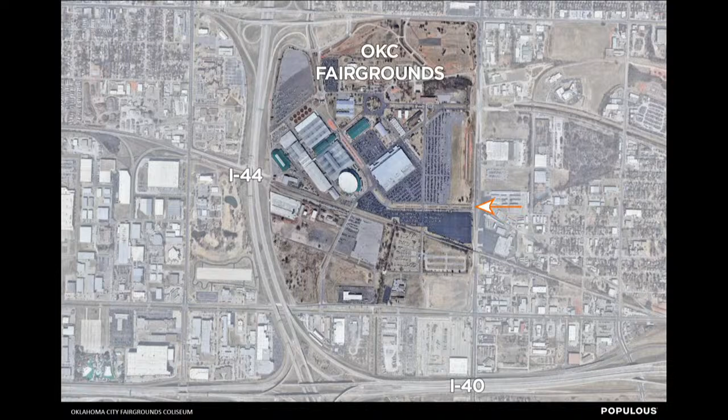So just giving us a frame of reference, once again, we're right here at the fairgrounds along I-40 and I-44, main entry off of May Avenue there on Gordon Cooper Boulevard. Replacing the existing Norick Arena, built in 1965, full all year long with over 250 event days a year, and we're going right up there next to it.

As I pointed out last time, we're actually overlapping just slightly a little bit of the front entry of the Norick Arena due to a couple factors.

Those utility restrictions prevent how far away we can get, and we want the Norick Arena to remain operational throughout construction of this new Coliseum, so we can't go right on top of it. This will be done in phases, which I'll walk through in the next few slides.

One item to point out that wasn't on the previous presentation is the expanded parking shown south of the railroad tracks. That's a separate project from ours—they're starting that now, and it will replace the parking our Coliseum is going to overtake with the new building.

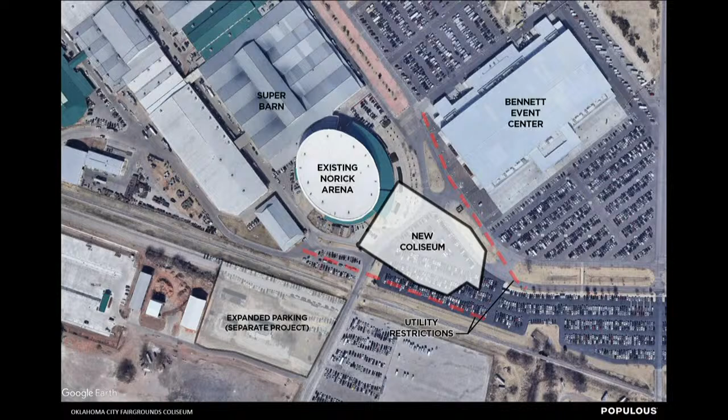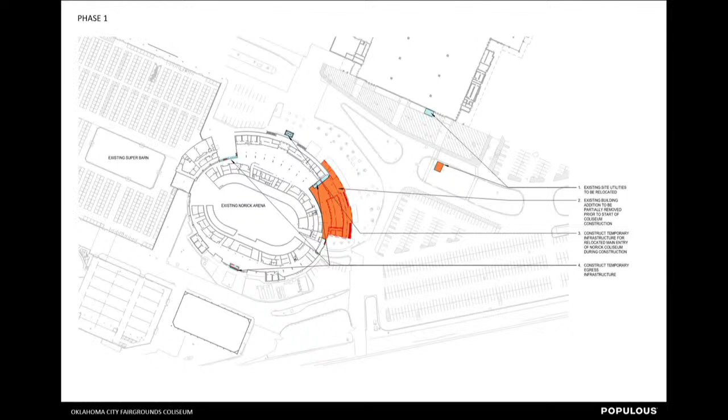Phase one of the project is the removal of the part that overlaps the existing Norick Coliseum. This shows the demolition portion in orange and the new construction portion in blue, which I'll zoom in on in the next few slides.

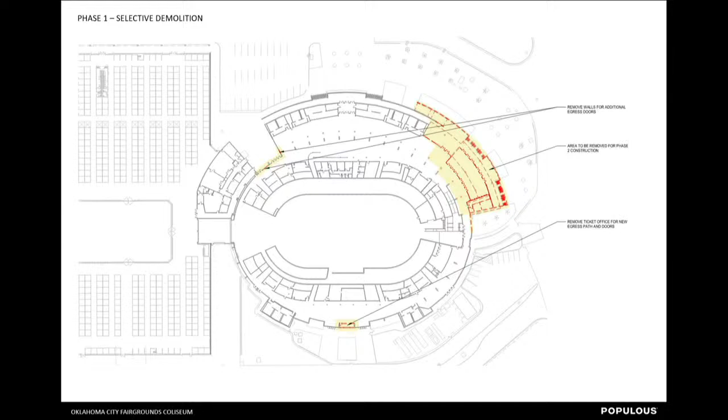The portion highlighted in yellow on your right is what we'll be taking off to make room for the new construction. That's currently the main entry to the Norick Arena, so we'll need to reroute entry and provide new exit doors when that's taken off. The other two smaller highlighted areas are demolition to make room for those new exit doors. So when that's done, this is what the Norick will look like during construction of the new Coliseum.

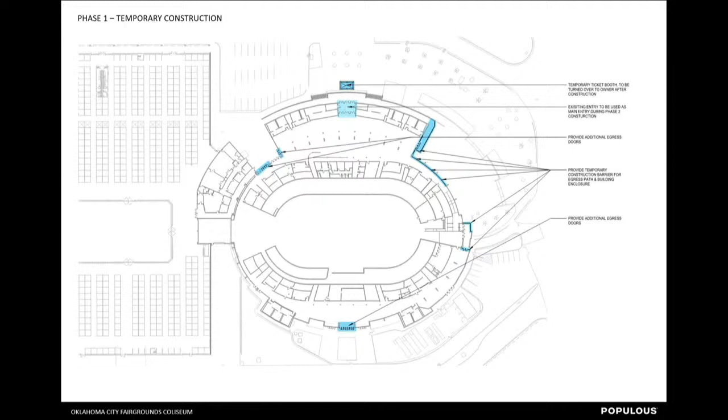The main entry will become the one on the north side of the building, which should work well since it's already one of the main entry points. We'll locate a temporary ticket office right outside, in front of the stairs, for them to use. The other areas shown are where we're relocating those egress elements—the exit doors—to make up for the doors being removed in the demolished area.

Phase two will be the construction of the new Coliseum, and phase three will be the demolition of the existing Norick Arena. We'll zoom in on that a little bit.

One thing different from the last time I showed this is that after talking with engineering teams, demolition contractors, and other groups, we think we'll be able to save that show office shown in blue. It's a unique structure—the last thing added to the Norick—and it straddles between the super barn on your left and the Norick Arena, facilitating both sides.

It's literally nested inside the super barn, so demolition of that was going to be really complex. We started studying whether we could keep it, because it's critical to fairgrounds operations, and demolishing it and having to build a brand new one would be a lot of trouble for them. If we can keep it, it will save us quite a bit of money on the project.

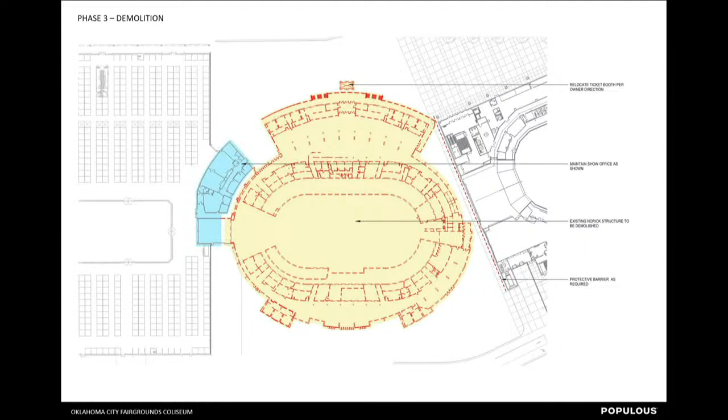After consulting with several firms, we determined that with some selective and careful demolition work, we think we can keep it. A portion will be removed where it utilizes the Norick ring wall, so we'll build back a new portion on the east side of that.

That's what you see here in phase four. Thinking about that, we thought it made sense to square that off so it's ready for the connector when it comes on board, and we can put that right up against there. That'll need to be a firewall, so a nice clean straight wall allows us to build that firewall and connect the connector right up against it.

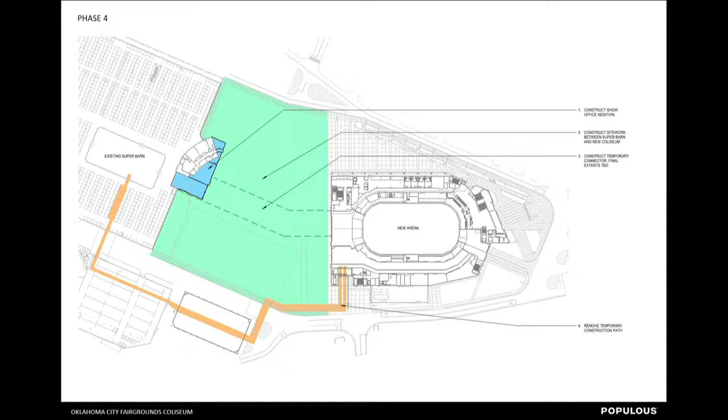From the exterior, you'll never notice that odd geometry in the middle. You can see with the dashed lines where the connector would abut the show office, then come across on the other side and connect to the new Coliseum. So this is our current site plan.

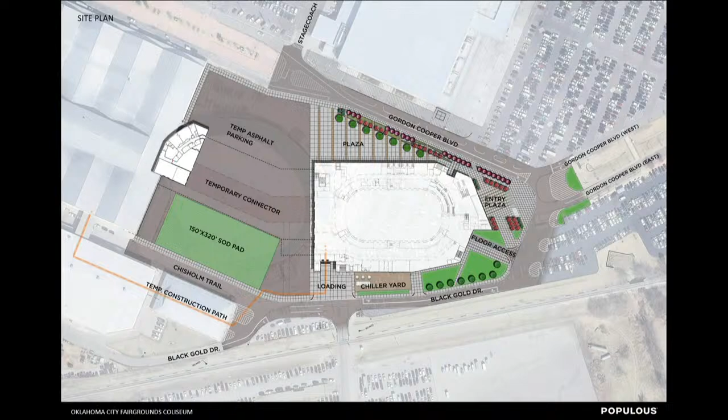You can see the nice plaza space there on the north side that will eventually extend all the way across to the super barn when the connector's done. The entry plaza there off of Gordon Cooper Boulevard at our main entry, and then coming around the south side, we've got some landscaping to shield the chiller yard, and then our Del Mar Gardens entry and loading area there on the south.

Looking at the floor plan, it hadn't changed a lot since the last time you saw it. I'll zoom into each area so we can look at it a little more in depth, starting with quad A in your upper right and then going around in a clockwise direction.

So here in quad A, we've got our lockers up at the top, shown in orange. We've got 6 total lockers, 4 shown here. Those have an operable partition between 2 of them so they can open up into a larger locker room space.

We've got our court storage where the basketball tournaments will store the courts and the goals. Our main restrooms off the main lobby there, shown in navy blue, and then our retail space there in purple.

The multi-function space will be left open so they can program it however needed per event. We've located doors on both the exterior and interior side so they can program that and access control it, so the exterior doors are locked if they have an arena event they only want access to from the arena side, or if they have the fair going on and want to open up the Made in Oklahoma store, but don't have something going on in the arena, they can open up those exterior doors and lock up the interior doors and have that access right there from the exterior.

We've got our ticket office there with a couple of offices in the secured area and a conference room, and 2 additional offices outside of the secured ticket area.

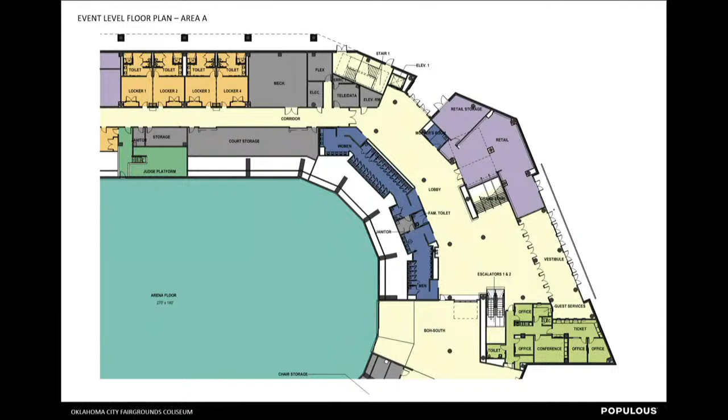As we come on around, we've got our retractable storage and chair storage here for the floor events. Those will come right out those big overhead doors and come through that back of house south area and go right onto the floor for events where we have full seating capacity. Those will be stored right there when they're not in use.

We've got our judges platform shown right there in green, centered on either side. That's right off the arena floor - one of the unique spaces in this arena. It's different than most. You'll be able to access that from the return alley side or the arena floor side, go up into the judges platform, and then come out of there and go onto the arena floor to hand out awards or go back through the back of house space. When that's not in use, we can infill that area for the full bowl to be seated all the way around.

We've got our green room and crew room there in orange, and then our loading dock down on your lower left side. Our large back of house space, where they'll set up all their penning and things like that for equine and livestock events, is there on your left.

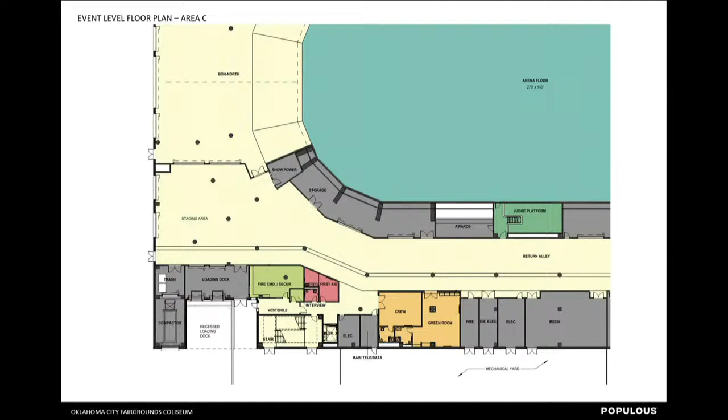And our north lobby there on your upper left - the main lobby for people coming from the barns or the fairgrounds will come into that space, secondary lobby there. And then our main kitchen area just to the right of that in purple.

That kitchen has a dedicated service elevator, number 3, that is accessed from the kitchen and goes up to a back of house area on the 2nd floor, so they've got dedicated service to bring things into the lounge space or concession spaces as needed. And then elevator 4 faces the lobby side and will be the public elevator for that lobby.

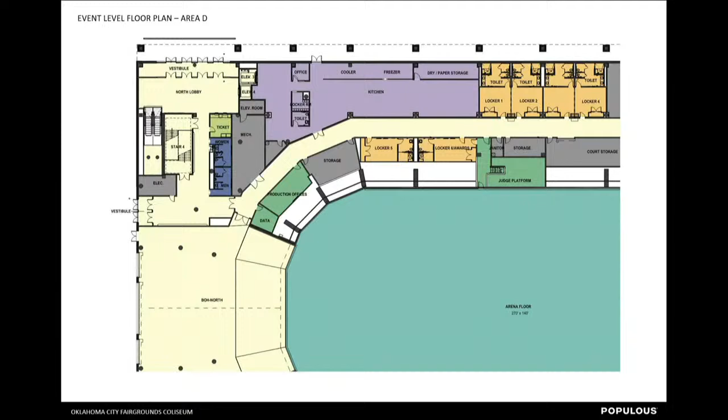As we get up to the 2nd floor, once again pretty similar to the last time you saw it, we've got our concessions in the 4 quadrants, our lounge space on the left, and our main bar on the right. We'll zoom in on around there so you can see it a little closer as well.

Nice big open concourse space as you come up from the main entry, with room for vendors to be located there on your far right side.

That'll be along that east facade that has the windows, so it'll be a really nice big open space with a high ceiling. Our main public bar is there on the bottom portion of the screen, and then our production suite in the green color, really nicely situated up above the seating on the concourse level with a straight shot view right to the stage, whether it's a center stage or an end stage. They'll have a really good view out the windows of that production suite to the stage.

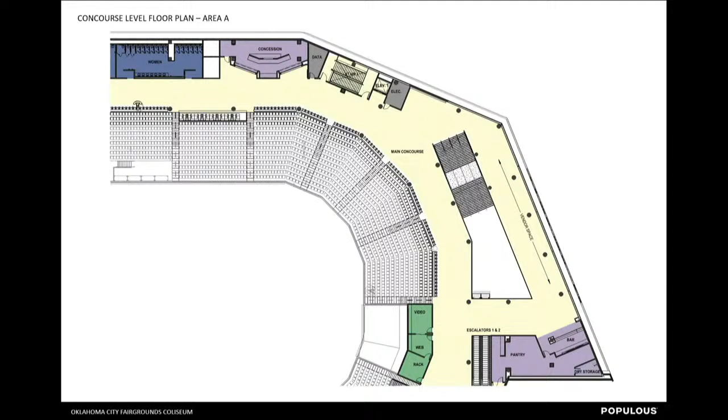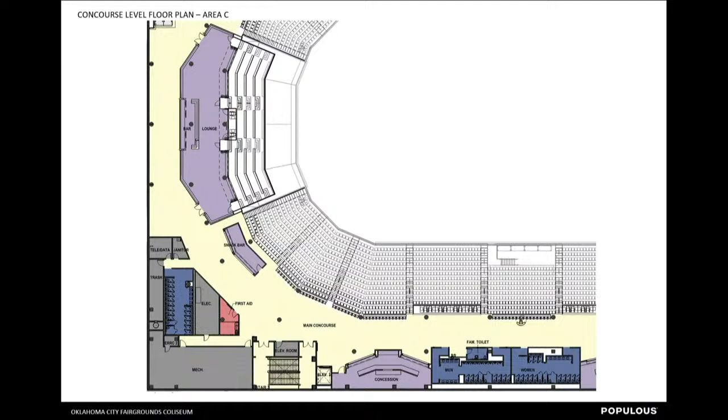Coming around there, we've got our 3 suites, 2 smaller suites and 1 larger suite, shown in purple. Our Quad B concession, and then our restrooms and service spaces. Quad C is similar - we've got a concession in that area, our restrooms along the perimeter, the mechanical spaces and trash spaces. And then we've got our big lounge there on the left side in purple with our loge seating off of that. So our premium space there on that side.

And then in Quad D, we've got a 4th concession there in the corner. As you come up from that north lobby, you'll have that concession right there as well as the lounge space.

Above all that, we've got our catwalk level, which is accessed from stair 4 and stair 2. You'll see here we've got 6 spotlight platforms around the catwalk. Those are recessed about 8 feet below the catwalk to give them direct line of sight without any obstructions for the spotlights during all their events. So that should be a big improvement from where they have right now.

We also have a rigging grid that goes across the full arena floor. That's a really great advantage for the facility and gives them a lot more flexibility than what they have now in the NORC. That's one of the issues they have - it's just really hard to host events that need any sort of rigging up above them because they don't have it currently. So that grid going all the way across will give us a lot of flexibility for any type of events that need to be hosted in there.

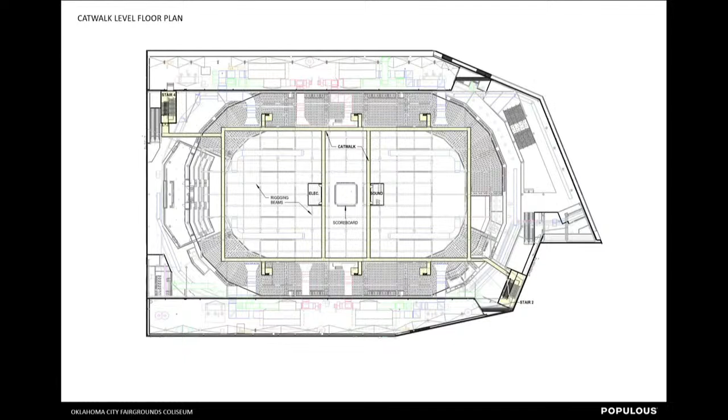And then above that, of course, our roof with our 2 mechanical wells on either side that push the air into the main bowl. So cutting through all that, we cut through the model as it sits right now, and you can kind of get a feel for what this space, how it all stacks up and how it all comes together. This is how we model now in 3 dimensions, and we have all of our consultants modeling in the same model, so we get to really coordinate how everything's coming together, hopefully find issues where things are conflicting and we can solve them now instead of in the field.

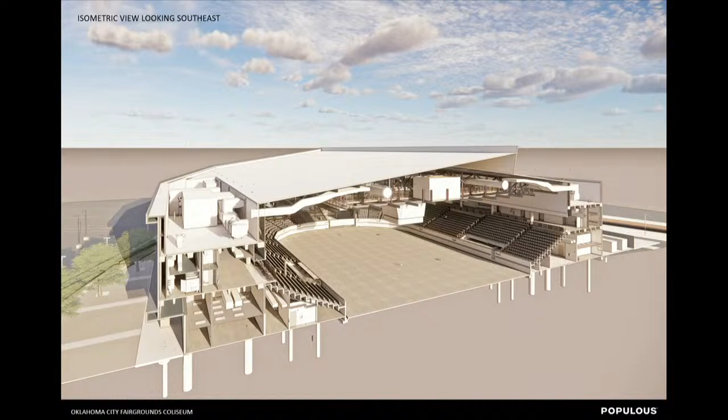But you can see those roof wells there with the air coming into the bowl, our concourse below that, and then our first level below the grandstands there.

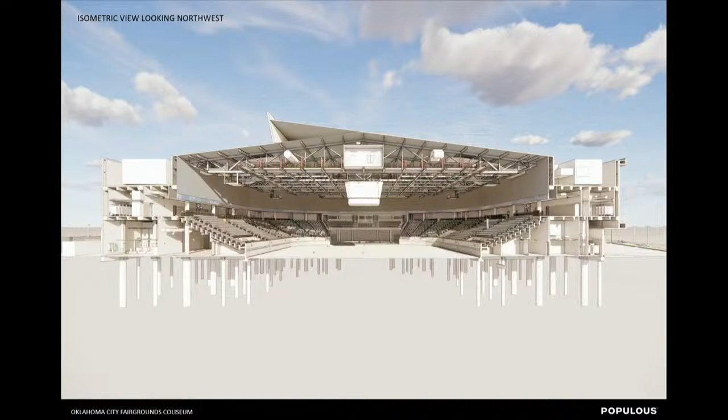As we spin around and look at the other side, you can see that rigging grid up above with the catwalks and some of those lowered platforms that I talked about for spotlights. The roof wells on either side above our concourse level, and then those areas that are tucked kind of underneath the grandstands there. All of that - the stands sit above our arena floor level for this facility, which is how we like it for the livestock and equine type of events.

And then when we do a full bowl experience, those portables will come up, and you can see those little notches in the wall, the arena wall there - that's where the aisles are. The portables will come right up to those, and those aisles will extend all the way down the portable bleachers. So the bleachers will go from concourse level all the way to arena floor.

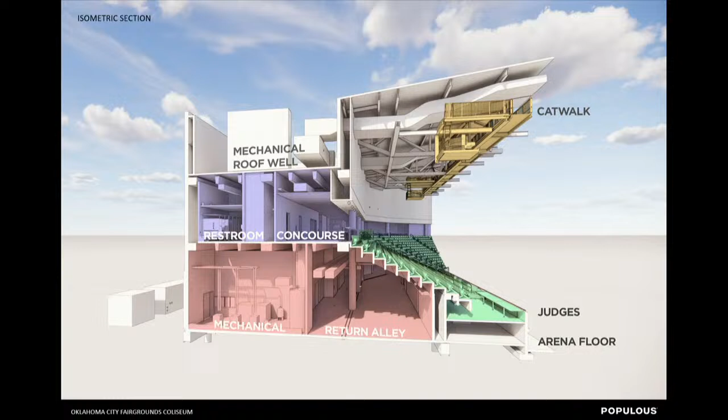Zooming in on that - I know there's a lot of information in that last one, but this kind of clears it up a little bit, just to separate the elements and give you an idea of how it stacks together. We've got our catwalk there shown in yellow. You can see a little better those recessed spotlight platforms. You can see our mechanical units coming into the space and going up over the catwalk. Concourse right there in blue, and the restrooms. The drink rail that we have all the way around the concourse level, right before you step down into the grandstands, is a nice feature that goes all the way around the concourse.

And there you can see those judges' platforms as well, how they'll be set up when they do all the livestock and equine events that have the judges located in those locations. And like I said before, when those aren't in use and they want a full bowl experience, they can infill those with seating. Then our return alleys under that and our mechanical spaces below.

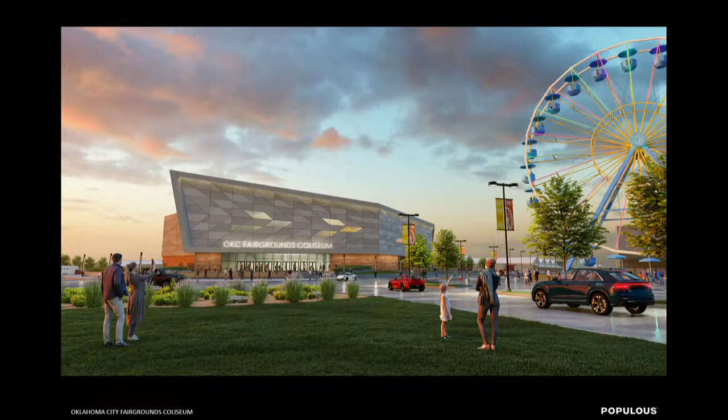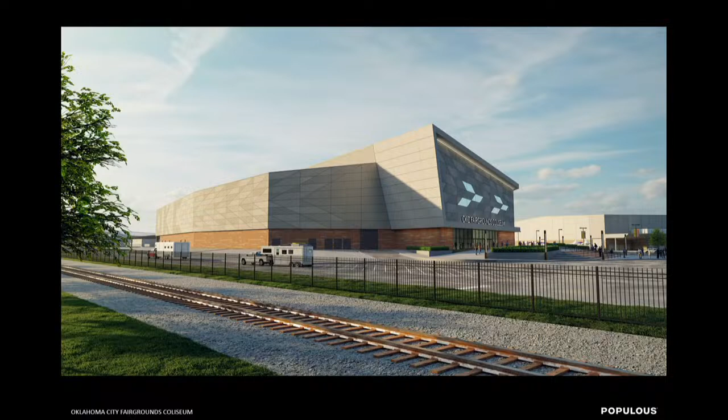Looking at the exterior, not a lot has changed since the last time you saw it. We've got our panel system with that dynamic pattern going around the upper portion, with the masonry on the lower portion. That wraps around all sides of the Coliseum.

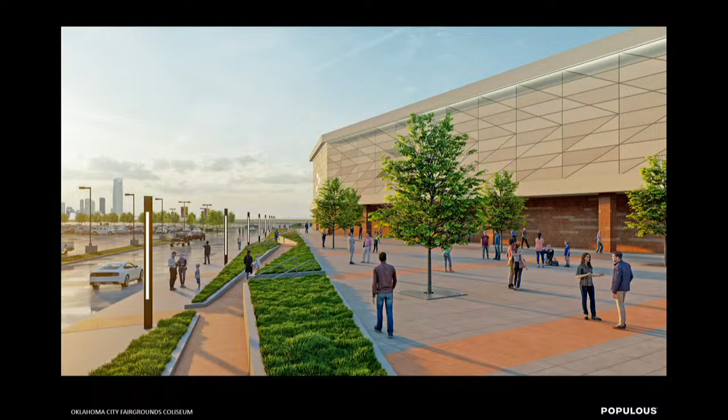We've integrated the big OKC there on the left side that we can see from the highway with the shading of the panels, so it should be a neat element to see from the highway as you pass by. We've got our plaza space on the north, nice and open and flexible, so that the fair can program it however they need for all their various events.

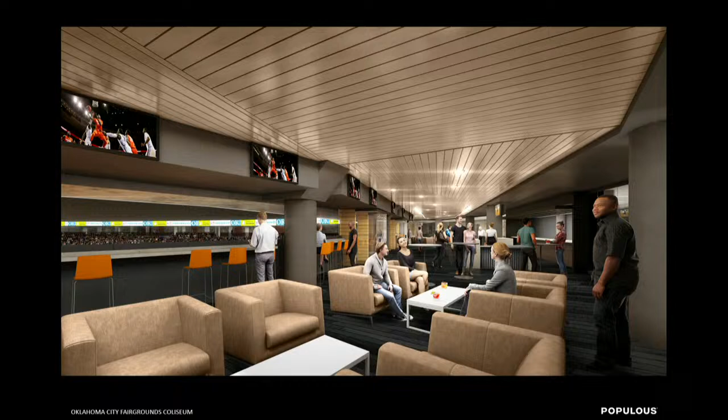Our lounge space, once again working through all the interior elements, gives you a sense of the space in there and the premium spaces that we'll have, and then our main bowl here with the livestock type of layout that we have.

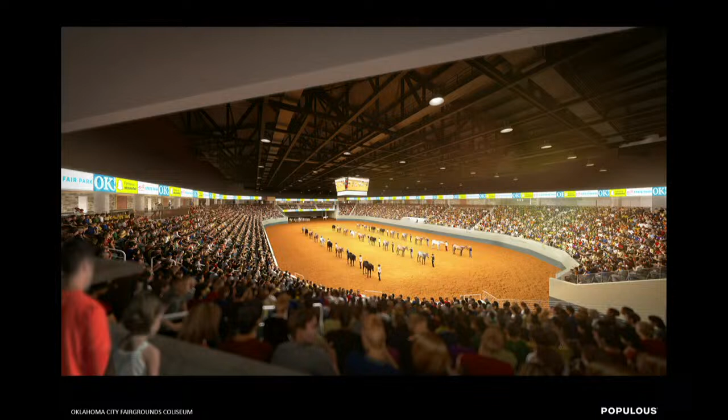Schedule hasn't changed since the last time you saw it. We're looking at finishing up the drawings and getting out to bid this summer, with the goal of starting construction directly following the fair this year.

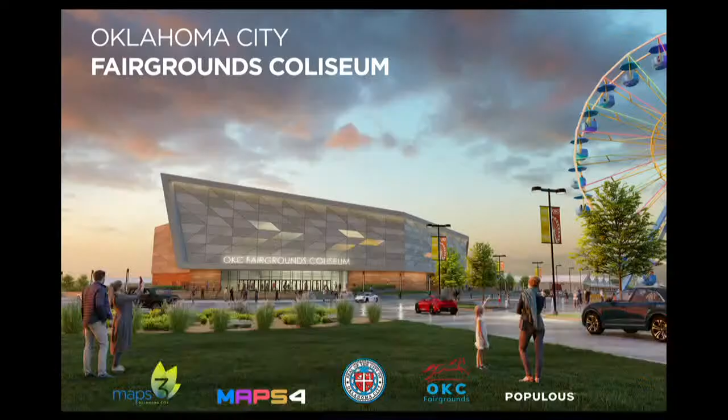And that's what I've got. I'm happy to answer any questions you may have.